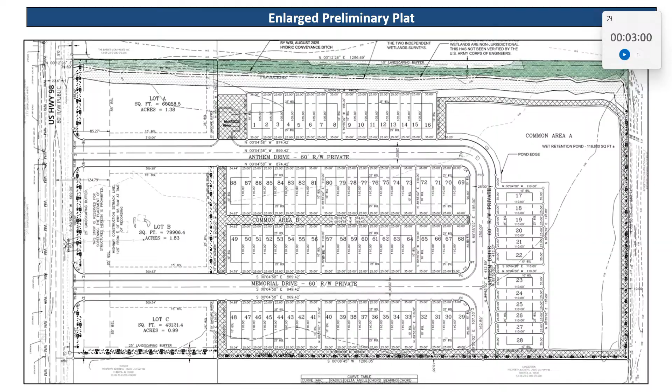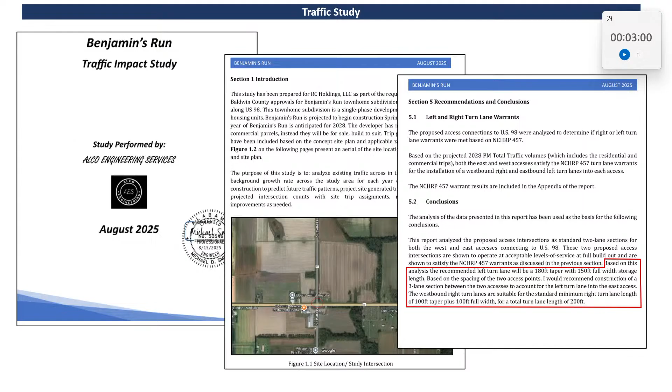Here is your preliminary plat and your drainage narrative with your landscaping plan and the results of the traffic study. And with that, I'm happy to answer any questions.

Okay, any questions for staff by the planning commission members?

Fabi, I know we've dealt with this in the past, but as part of the process, are we still at a minimum reaching out to the school system and letting them know this is happening? Whether they respond or not is immaterial, but that is still happening? Yes, sir. I only ask because they literally got the CO for a 12 classroom expansion at Elbert Elementary less than a month ago. And I'm going to go out on a limb and say that 88 townhomes are probably going to fill up those classrooms fairly quickly.

Sure. Thank you. It was shared, but no response was received from the Baldwin County Board of Education.

Thank you. Fabi, this may be a question that the developer or the representative can answer, but usable open space, how is it defined on that map? How do I know what is usable?

The hashed lines here. So we're calling all the hatched areas as usable? Yes, sir. Usable how? For recreational areas.

Right, they have not identified playground areas and open grass space areas. They did put in a trail around their stormwater detention pond here that kind of connects around.

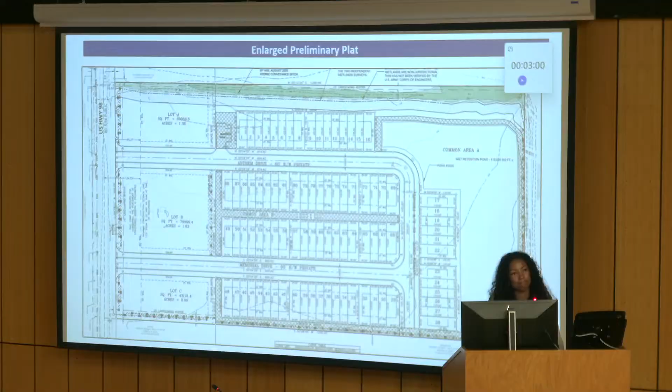Yeah, Steve, this is one of those - by putting the trails there, how we define it has to be activated. Like it has to have something done to activate the space, trails or whatever. So it's activating it.

Is this really the intent, what we were trying to go for? No, it's not. The reality is the type of units you have here, there's no yard space, very little. There should be an actual usable park in there somewhere. That's the whole point of open space to me, is to provide for something the individual lot does not provide for, and I just don't see it here. This is definitely not the intent of what we wrote the usable open space criteria for.

I don't understand this T-junction in the middle, the trails around the thing. I can understand we walk it, we might bike it, a playground area on the bottom left is a square, I understand that one, but this between them, that doesn't make sense. That's more difficult to understand or to see.

It looks like anything that's not used for the detention basin or unit building footprint, we're calling common area or open space, and that lies like an alleyway between these 50 units in the middle.

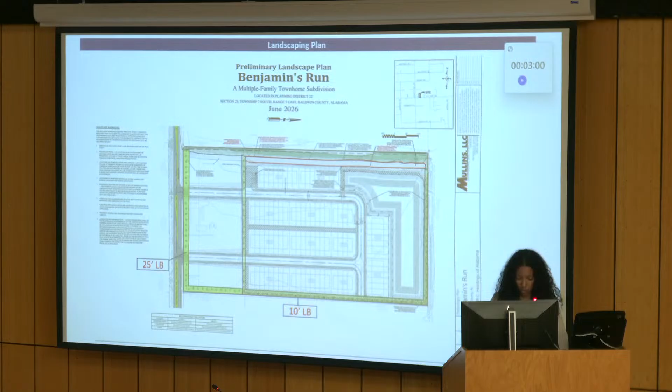What's the vertical height of these structures? Again, we were not provided plans of what the townhouses are going to look like, but I believe there's a height limit of 35 feet per the RMF 6 zoning district. I could be incorrect on that without the book. So we don't know if they're 3-bedroom, 4-bedroom. It is not part of the subdivision requirement at this point. Okay.

I've got public comments, public input, so I'll make sure. Anybody else have any questions for staff? All right, let's go to that. Joe Rector is the representative of the developer, I'll let him come up, and then we have a couple of others, one other.

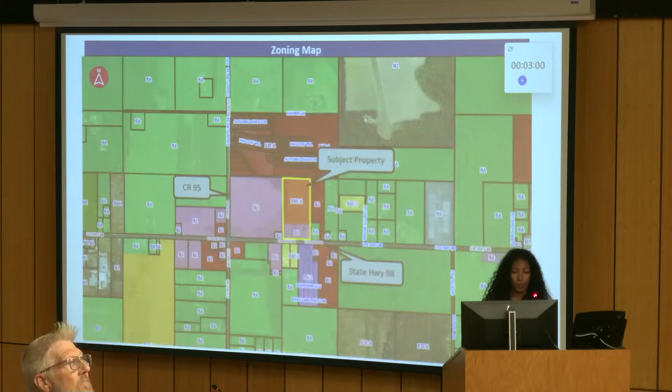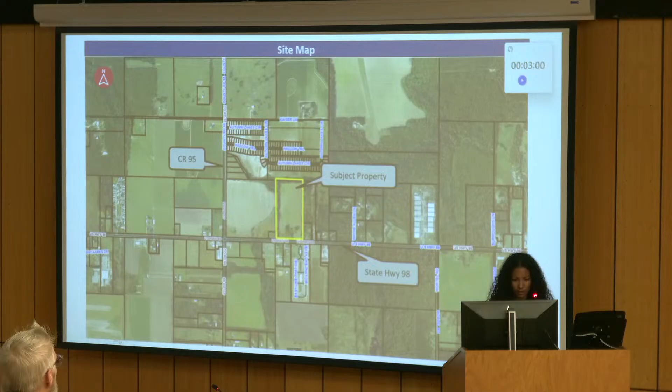So is there something on that B3 now, as far as like a fence? I'm not sure. I'm talking about as far as the business. That property owner can probably speak on behalf of that, because I'm gonna go look in the aerial here. It's very vegetated, there are some structures here along 98, but that property owner can probably answer as to what sort of business is being conducted. But that one's not adjacent to us, not on the piece where it's adjacent to this. Okay, right.

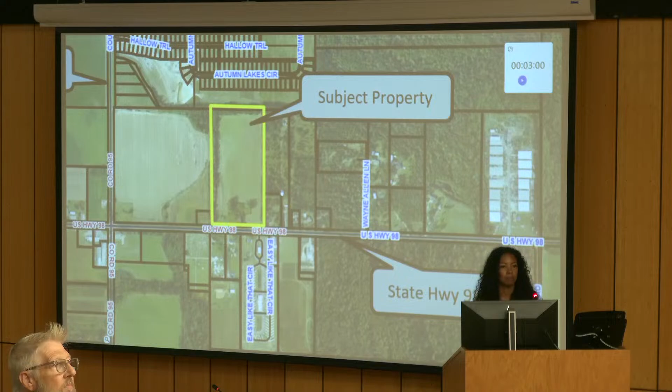Any other questions? I just have a comment that I think we're going to see this from time to time, where they meet the requirements, but it's not what we expect. We're going to see this time to time where the developers are on the edge and they meet the requirements, but it's not really what we wanted, but they're doing it anyway, and I think we're going to see it occasionally.

I think what puts this one in a little bit of a difficult situation is that it's not your typical subdivision, it's because it's a high-density development. It puts it a little bit in a gray area, even though we still have to go by our subdivision regs. I get that, but it makes us, I think, ask some of these questions that we normally wouldn't ask on your typical subdivision. All right, no other questions? Thank you, Mr. Rector. I'm going to close the public hearing. We've talked about it, I think, enough. Now it's time to decide what we want to do, unless you have a question.

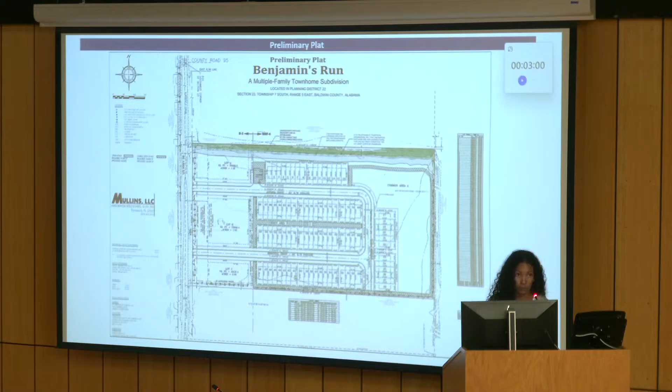Any other questions on the motion? All in favor say aye. Aye. Any opposed? Motion carried.

Okay, this time we'll open the public hearing for case number SPP 26-06, Lanterna Phase 1A subdivision. Does anybody need to declare prior communication on this item? Ms. Waters? Thank you, Mr. Chairman.

So the next two agenda items are going to be two phases of the same development, so the staff reports will be very similar. This is the application for SPP 2606, Lanterna Phase 1A, a preliminary plat approval for a 54-lot residential subdivision. The subject property is located in Planning District 15. This phase is zoned RMF6, multiple family district. As mentioned, the request is for 54 lots, which are townhouses. This development is associated with an already approved PRD site plan. The public utilities proposed are Belforest Water System, Riviera Utilities, Baldwin County Sewer Service with treatment plant at Malbis, and AT&T for broadband.

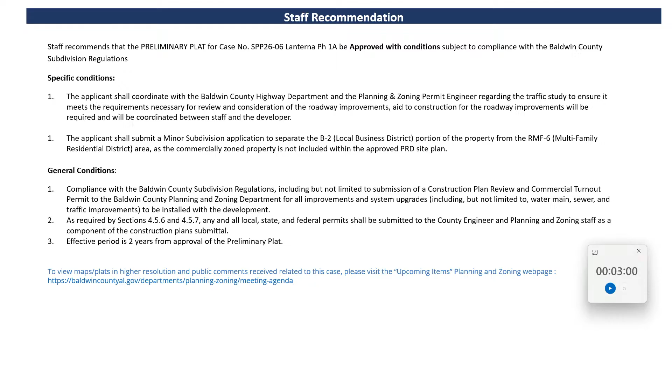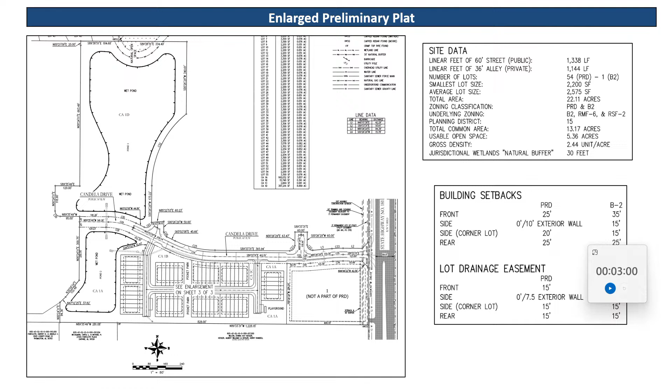Here is your zoning map of the subject property, the site map, your preliminary plat enlarged showing the townhouses, and an approved PRD site plan reflecting all the phases for the development. Here is your drainage narrative and a landscaping plan of various buffers. And with that, I'm happy to answer any questions.

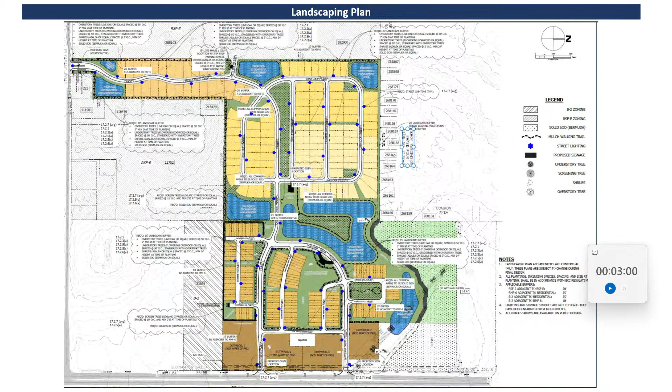Okay, any questions for staff? So this is in the county and it butts right up against City of Daphne, correct? That's correct, the red in the site map reflects the City of Daphne. Okay, any other questions?

All right, we'll start with Sam Dean. My name is Samuel Dean. My wife's right back there, and I'll be speaking on her behalf as well. My wife was born and raised on Pleasant Road. We have built two homes on Pleasant Road.

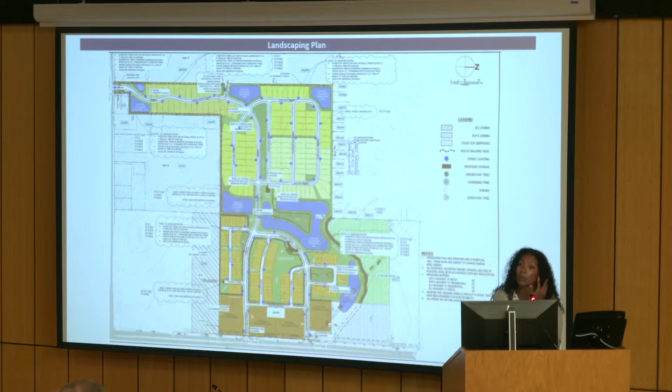Gotcha. And last thing—so the original, the last time we did this and the zoning was changed, there was a huge uproar.

I don't know if y'all remember or not, but it was about the flooding side, especially around the wetlands area and everything. So has anything changed since then with somebody going out and the whole delineation that you were talking about? Has anything changed on that?

This part of our review, the earlier part, has happened with the stormwater narrative. They're meeting or exceeding all our requirements. What we also do, which is really more part of the next phase of construction plan review, is evaluate their stormwater impacts to the watershed too. So we don't look at just the site, we look at the watershed and make sure the design accommodates and does not cause off-site issues.

Gotcha, okay. Yeah, well thank you so much. I appreciate it. Thank you, sir.

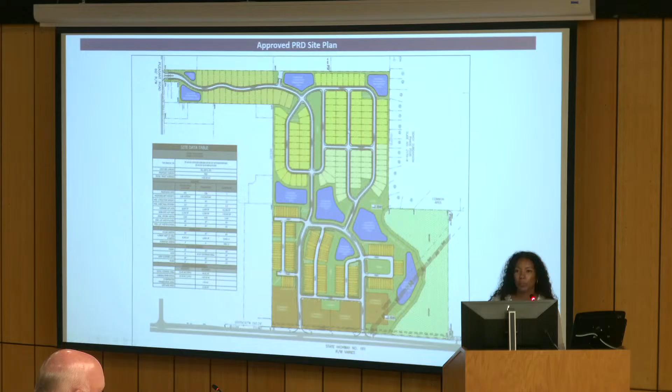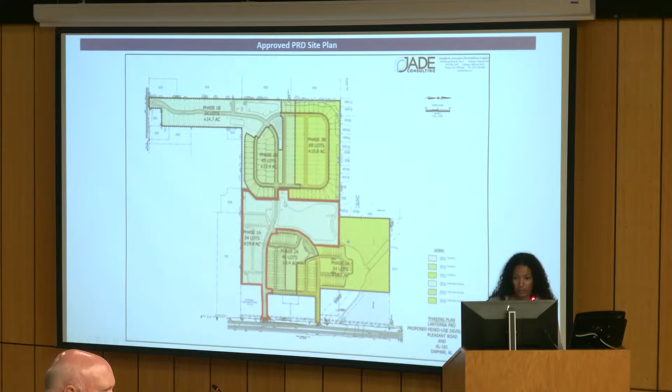Yeah, they are allowed to relocate some of their roads — that's not considered a major change internally. So this is the actual plat design here. As you can see, this is the preliminary plat, and you can see the road is in between the two proposed stormwater ponds. But that's different than what is shown on your original plat. This is the preliminary plat. The conceptual plan from the PRD was not a more fine-tuned, detailed plan like what we have in front of us now.

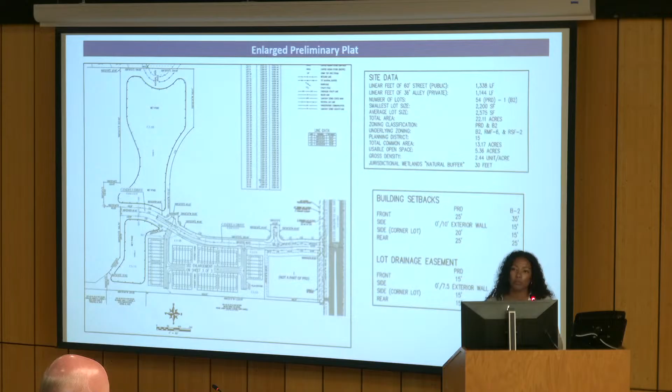It's conceptual — the size and shape have changed. And that's what I'm getting at. Also, on the north side of this pond that's shown on your screen now...

...is close to where these lots are that are currently experiencing issues, and we have documented proof that those lots have water running across the back of them coming out of that wetland, traveling from the northeast to the south to this pond. So if you raise the elevation of this pond whatsoever on the north side, the far northeast corner of that pond, it's going to impede the flow.

I think I got five minutes instead of three since I'm representing an organization. If you raise that elevation whatsoever, it's going to back that water up and put it in these people's yards and potentially in their houses.

So there's some serious issues that need to be addressed right here on that corner and in that pond, and some further discussions on how that pond is going to be constructed. And it's a real deal.

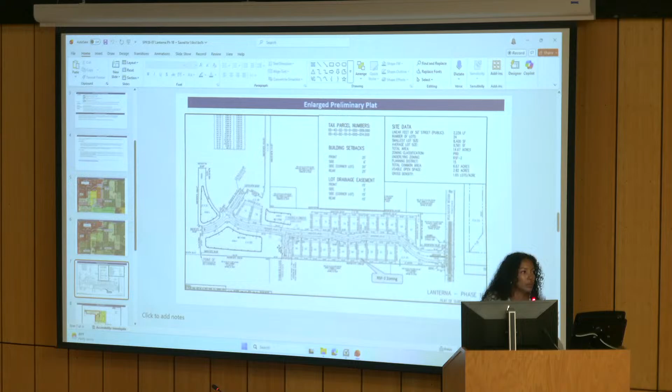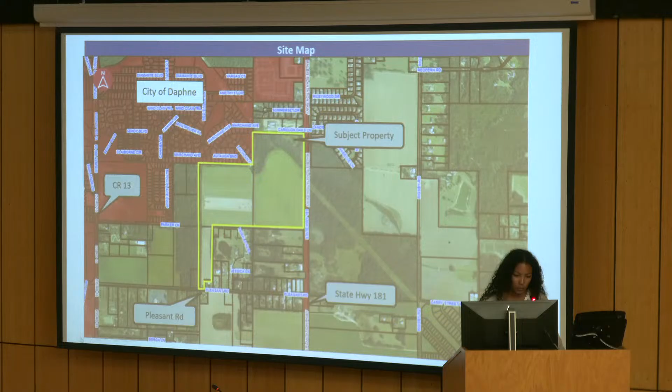Anybody else? I have a question. What would, this Parker Lane has been referenced. What makes that not feasible for, let's say, an additional entrance? Well, let me bring up the aerial imagery here. So if you look at it, Parker Lane ends at this subdivision, and there's this tract of land right in between that's currently just private property that is not open. So it would take someone to purchase the right-of-way or possibly develop this parcel to actually connect Parker Lane to the Lanterna development. I do not believe the current property owners of Lanterna own this parcel.

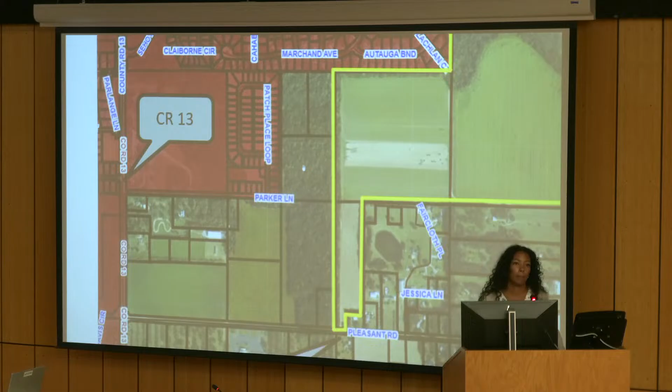This is a question maybe for the developer, whoever. Has that been entertained, or has that been approached, where Parker Lane would go across this wooded lot? As we make sure, just like Daphne did with the subdivision to the west, they plan for those connections, and just like we're planning for it with Lanterna, then as whoever owns that property in between does something with their property, we would get the right of way and the roadway connection. So we kind of phase it in as the properties are developed. It's planned, and it will come whenever that gets developed.

Anyone else? All right. No, 1 for 1B. Oh, really? Okay.

Okay, all right. So if you've already spoken, we've heard your comments. I think some of your comments were applying to this particular leg of the development. So was there anybody else that hadn't already spoken that didn't sign up? I just want to make sure. Okay, well, come on up.

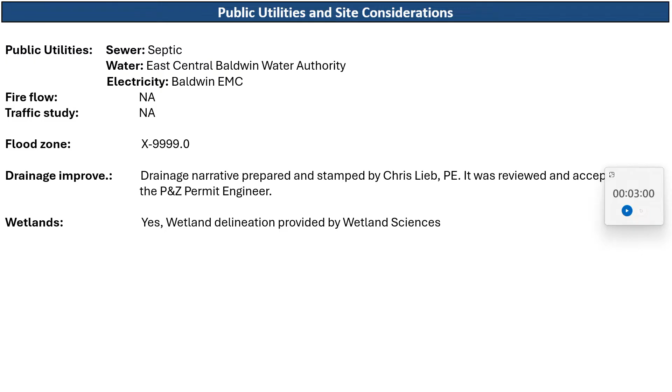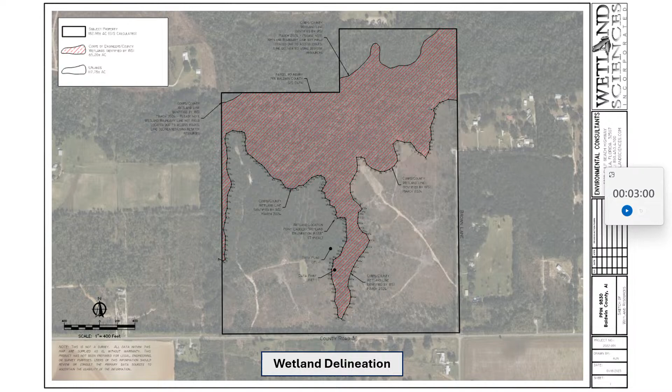Here's our location, Planning District 18, unzoned. Aerial map. Our wetland delineation. Here's a copy of our drainage narrative from Chris Lieb.

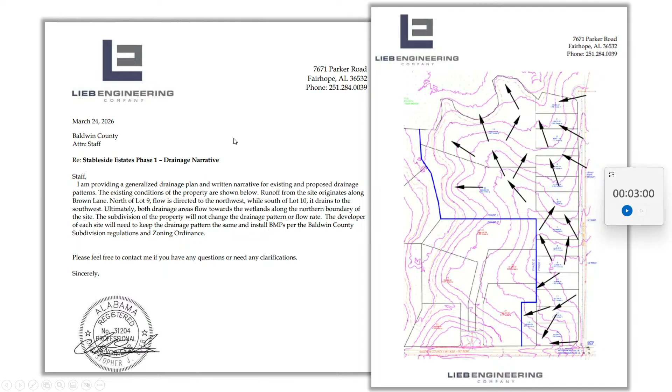The history: there was a common lot line move done 11/19/2025, and it was approved. It was also SPP 20 Legacy Hill subdivision, which was approved 11/7/2024, approved with conditions, and the developer chose not to move forward with this project.

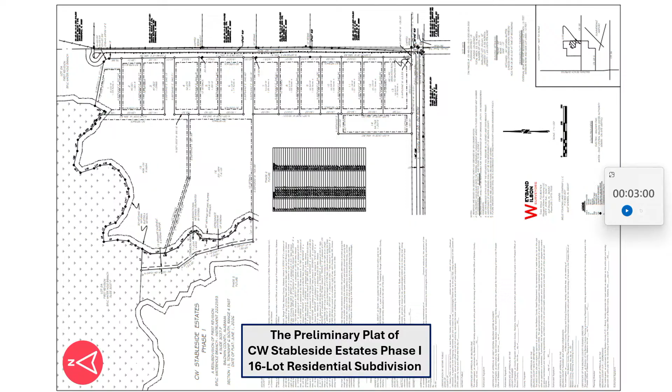Here's a copy of the preliminary plat of CW Stableside Estates Phase 1. Here's an enlargement of the plat. Again, this is SPP 2609, Stableside Estates Phase 1, the 16-lot residential subdivision.

All residential lots will be accessed through single residential drives and must adhere to the Baldwin County Access Management Policy. Staff recommends that the preliminary plat for case number SPP 2609, CW Stableside Estates Phase 1, be approved with conditions. All required wetland buffers in common areas shall be marked with permanent signage as one condition. The second condition has already been satisfied: the quitclaim deed for the 40-foot to Baldwin County was already provided. Any questions? All right, any questions for staff?

I have one question on the wetlands. When we post them or signage them and call that permanent, I know it'll be part of our inspection process. Is there any follow-up to that down the road, or do we just make sure they put it in there one time as soon as they pass inspection? Are we done with that?

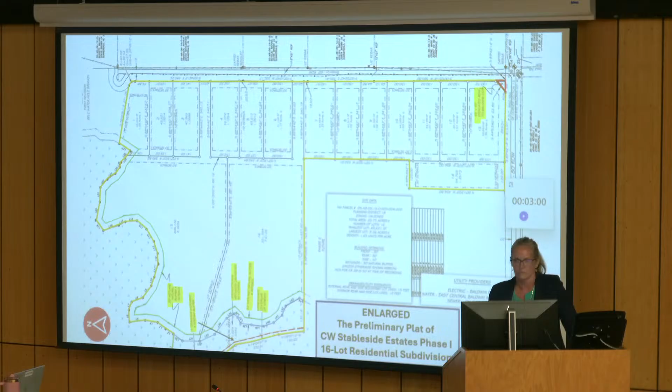I believe there is maintenance follow-up. Ashley? We're going on good faith that that sign stays there. Okay. All right, thank you.

Any other questions for staff? All right, I have one signed up, Tim Voslow. Tim Voslow, 20804 Brown Lane. I was up here for the previous options of this property. I got a couple questions.

I emailed somebody today with five brief questions. Did y'all get that? That may have been me, sir, I was in a meeting this morning. Okay, I don't know if they got that or not. No, sir. Okay, I'll be quick here.

If it's a subdivision, do the subdivision regulations apply here with no internal roads and all the driveways off of Brown Lane? What would the landscape look like on Brown Lane? Section 6.2, the landscape buffer, is for 50 lots or more - that's when it goes into effect.

Okay, so this is just 16 lots, each an acre or more. So right now the right-of-way on the road there is like a 30-foot right-of-way? Okay.

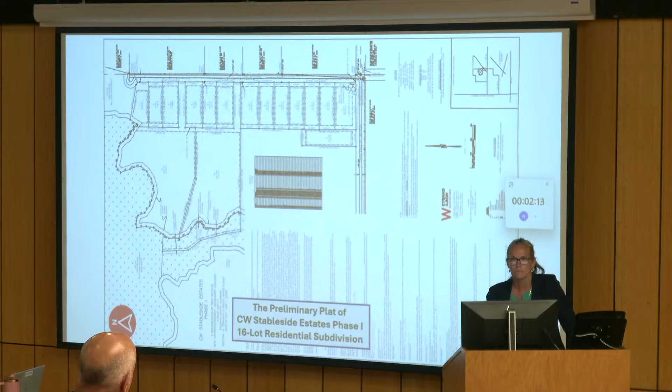And the intersection right there, the misaligned intersection we talked about previously, where it looks like you've got 45 feet cut out for Baldwin County - what is that triangle for? That is a corner clip that's going to be dedicated, actually already dedicated to Baldwin County. Like for a future turn lane or roundabout, or what are we talking about there?

Typically it's just when we have a hard corner like that - these old right-of-ways did not have corner clips or radius at the intersection. So when we have developments come in, we get that to allow for proper sight distance and things. Okay, so it basically improves the safety of the intersection. Yeah, because when you come out Brown Lane, you got to really put your nose out there and get clipped off when you're coming out there right now. Okay.

So a couple years ago, Baldwin County was doing the painting of Brown Lane, and they stopped. They did the yellow down the middle, and then I guess for the white edge lines they were scraping the weeds before they paint - is that how they do that? Whatever the maintenance process is. But then they stopped because they were just tearing up Brown Lane, and they said it was just crumbling as they were going down there with the machine.

With all these new lots up here and construction equipment and new traffic, Brown Lane is already deteriorating. Do we have plans, or are there plans to overlay that or anything like that? That would be a question for the highway department - that's part of our normal maintenance. Because that's an existing county road, so it'd be part of our normal maintenance cycle.

Mark Ackerman is here, but he just stepped out - he can get with you after the meeting. Yeah, because it's getting pretty bad on the sides. Yeah, and there are no white lines anymore.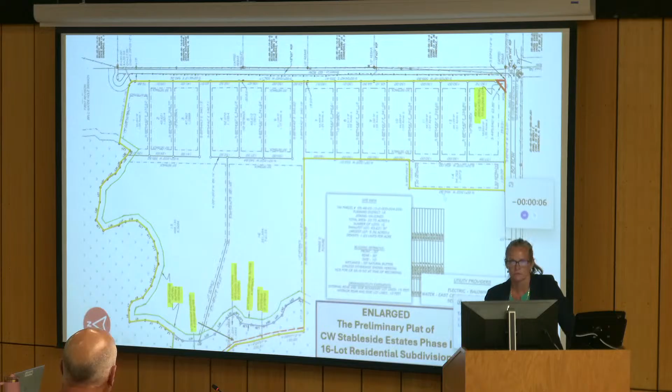No plans to shave down Thrill Hill anymore, like we've talked about before? All right, thank you. Thank you.

So I wish Mark hadn't stepped out, because he asked me a valid question. If that roadway's already deteriorated, is it not on the developer? It's not, as long as it's paved and meets our width, which it does, then no, it's not part of the subdivision regulation. Regardless of the condition of it? Regardless of the condition, yeah. All right.

How far apart do the driveways have to be that are going to be coming off of Brown Lane? So our access management plan, this is a minor residential street, so this would be treated kind of like any other street inside a neighborhood, because it doesn't go anywhere. The short answer is it varies. If it was on a major through street, it could be up to 250 feet. That's what I was asking. This street would just be treated like a minor local residential street, so there's not that requirement.

Okay, any other questions? Is there a representative of the developer here? Because I had no one signed up. Do you want to speak or not? Okay, I had no one else signed up. So I'm going to close this public hearing. Unless you have questions, I'll entertain a motion.

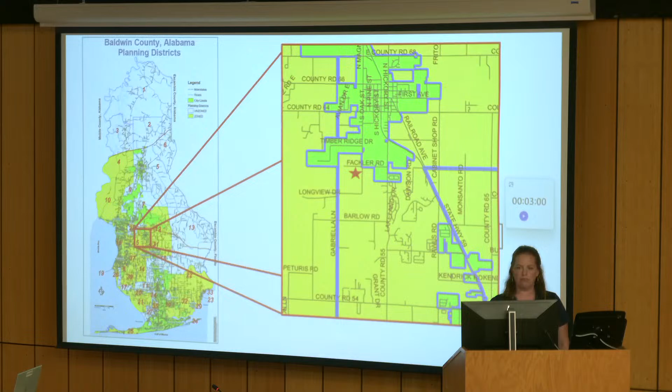All right, all yours, Ms. Wilson. We have SRP 2609, the replat of Lot 1 of Sherry Frolic subdivision. This is a common lot line move request, but it is a major change to a recorded subdivision since they're changing the outer boundaries. It is located in Planning District 12 off Fackler Road. The request is to relocate the lot line between an existing lot in a recorded subdivision and an adjacent parcel not within the recorded subdivision. No new lots are being created.

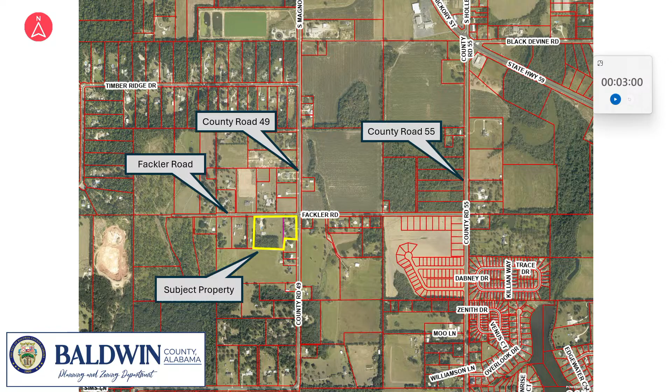Again, the applicant is requesting to relocate a lot line. The parcel is within the city of Loxley's ETJ. Loxley has chosen to review the request administratively, so the Baldwin County Planning Commission must hear it. The proposed lot line move meets all requirements of the zoning ordinance. Here's an aerial image with the two subject properties highlighted in yellow. And again, this is at the corner of 49 and Fackler. It's zoned RSF2. This is a copy of the original subdivision.

You can see parcel 1 on the corner. That is the subject property. Then there's a gap, and then it shows parcel 2 and parcel 3. When they originally platted this subdivision, it was kind of unusual to have parcel 1 and then a section not within the subdivision. So that's what we're talking about today.

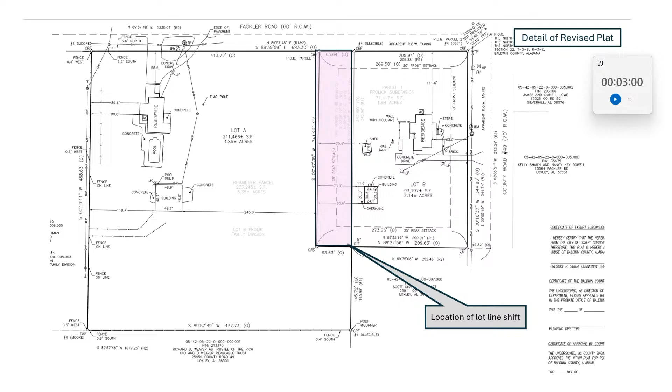Here is a copy, or an image, of the proposed replat. And on the next slide, I've highlighted the section that we're moving. Lot 1 is moving 63 feet into the part outside of it. So it's just a standard common lot line shift, but since technically the outer bounds of parcel 1 are changing, it must be approved by the Planning Commission. Staff is recommending approval, and I'll be happy to answer any questions.

Okay, any questions for staff? Okay. Do I have anyone signed up on this one? Because I don't, unless Elizabeth, you're going to send me something. I'm sorry? Just Hunter Smith. Okay, oh, there you are, you moved on me. Do you have any comments you need to make? All right, Mr. Smith's here if anybody has any questions for him. Okay.

All right, I'll close the public hearing. I'll entertain a motion. I'll make a motion that we approve case SRP 26-09. All right, Mr. Mullis made a motion that we approve. Do I have a second? Second, Mr. Bice seconds the motion. Any questions on the motion? All in favor say aye. Aye. Any opposed? Motion carries.

All right, we'll open the public hearing now for case number SRP 26-10. This is the replat of Lot 2 of Bond and Main subdivisions. Anybody need to declare prior communication on this item?

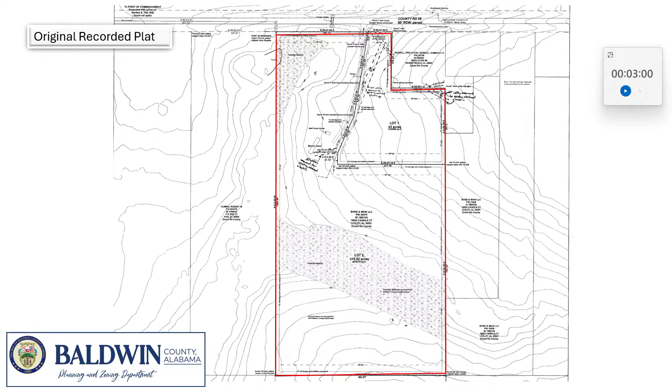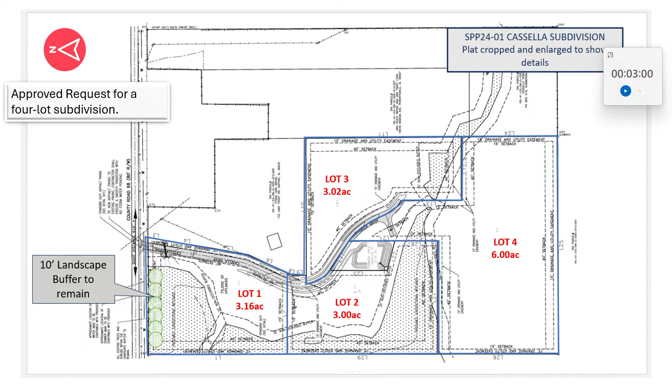Here's the subject property. It is zoned RA, rural agriculture, as well as the adjacent parcel. This is a copy of the original recorded plat that created Lot 1 and Lot 2 of Bonds and Main. This is an image of the approved request for a 4-lot subdivision. It was going to have 4 lots, and the developer was going to build a road to access those lots.

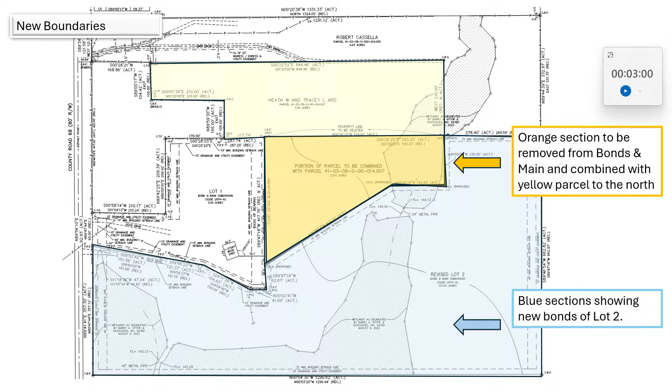And the new request, the blue parcel is going to be what's left of Lot 2, Bonds and Main. The middle orange portion is what is being removed and added to the yellow parcel at the top. This is the image of the new plat once it's recorded. Staff is recommending approval on condition that a common lot line exemption is applied for.

I'll be happy to answer any questions. Okay, any questions for staff?

So the blue section shows the new Lot 2. The orange section is to be removed and combined to the yellow parcel. Is that the one labeled Lot 1, or is that the one labeled Heath and Tracey Ard? Heath and Tracy. So are we creating a parcel that doesn't have road? We're not creating a parcel. The Heath and Tracy parcel is already in existence. They're making it larger. Okay. Gotcha.

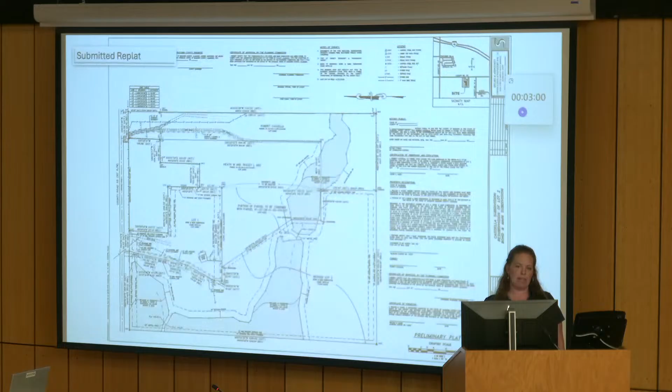And I did want to point out on this blue, you do not see the wetland buffer, but I did receive a revised plat that does show that 30-foot buffer. And with this common lot line move, it will do away with the previously approved 4-lot subdivision, so that will no longer be on the table.

But Mr. Bias does raise a question that I thought of. So do we somehow make sure these are done together? You don't want that deed recorded that creates that standalone lot there, and then all of a sudden, like they did on this other one, they say, oh, we decided we don't want to do this, and now we've got a parcel sitting there. They would need to submit it all at the same time. I just wondered, do we ensure that they do? We do. And I've talked to the applicants and the adjacent property owner. They are excited. They want this. They're ready.

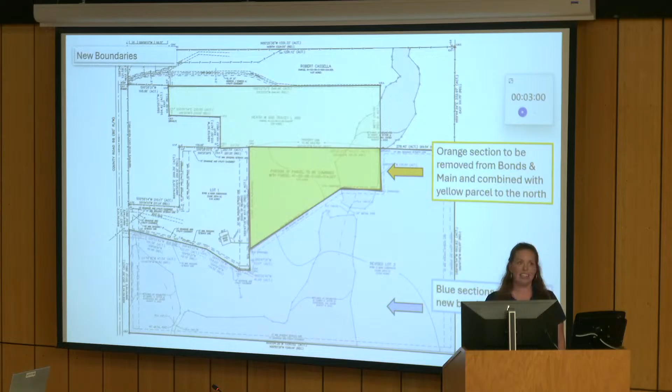Fabia has pointed out that in the survey it says property line to be deleted. Okay. Any other questions for staff? All right.

All right, so now I've got comments on, so if you were here for the last project, the Cornelius and Mercer, were you guys here for the last item? Not here? All right. Are you Haley Cornelius? Okay.

Any questions? Okay, thank you. Okay, thanks. That was easy enough. How about Sherry? All right, you're good. All right, that's all I had signed up to speak.

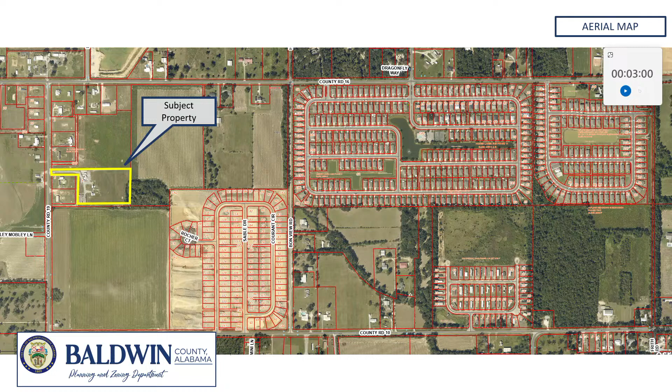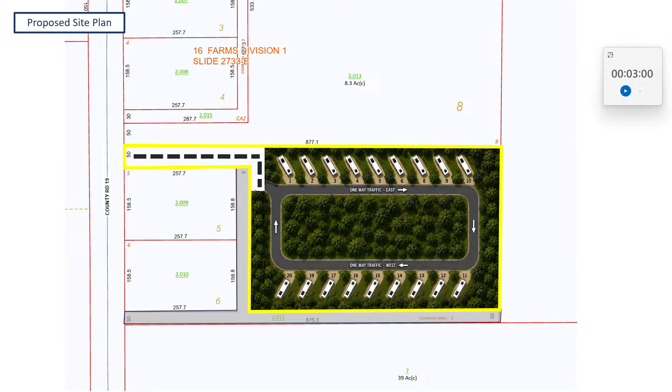Here's an aerial imagery showing the subject property highlighted in yellow. A detail of the property, and we'll get into more details in a second. Here's a proposed site plan. This property is for sale. The potential buyers want to put an RV park on there. And the proposed width of 50 feet does not meet the 60-foot requirement. Since it's already an existing lot, but they would be expanding it, they would need to meet the new conditions of a 60-foot flag requirement.

This is a lot of words, but it's all pretty applicable, so bear with me. The applicant is requesting a variance from the minimum width of the flag portion of a lot. Current regulations state the flag portion of all lots must be a minimum of 60 feet wide. This flag was approved in July of 2020. At that time, the minimum width of a flag was 30 feet, and the minimum width of access for a major project was 50 feet. This property is currently restricted towards any development except the development of 2 single-family dwellings because the flag does not meet the current minimum width requirements.

This variance would allow for future development of a major project such as an RV park. The property has several restraints that will not allow the 50-foot flag to be increased. The property to the south, Lot 5, is 40,847 square feet. If Lot 5 were to sell the subject property a 10-foot strip of land to increase the flag portion, Lot 5 would be below the required 40,000 square foot requirement. In addition, Lot 5 cannot gain additional square footage from the west, as there is a platted common area between Lot 5 and the subject property. The subject property cannot gain 10 feet from the property to the north, as it is also currently served by a 50-foot flag, and we cannot increase the nonconformity.

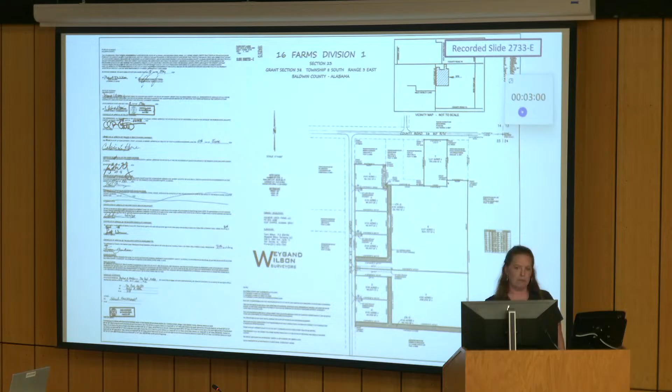Now I have photos to make it a little easier to understand. Here's the recorded plat. This was in Foley's ETJ at the time. Our county engineer signed off, planning director, and it's showing the lots with the two 50-foot flags. Explaining the limitations of expansion.

So the developer has talked to the owner of Lot 5. Lot 5 did entertain selling them 10 feet, but that would put them below the 40,000 square feet. Then we said, why don't you get some of the land off the back? Can't do that because they're not adjacent, and that's common area. And again, there's a 50-foot flag to the north, leaving essentially their only option to donate this 50-foot flag to the county, build a road, plat it as right-of-way, and that would alleviate the access issue, since then they would not be served by a flag, they would be served by a right-of-way.

And just a reminder, Article 8 for variance states that where it is found that extraordinary hardships or practical difficulties may result from strict compliance with these regulations, the Planning Commission may approve variances so that substantial justice may be done and the public interest secured, provided that such variance shall not have the effect of nullifying the intent and purpose of these regulations.